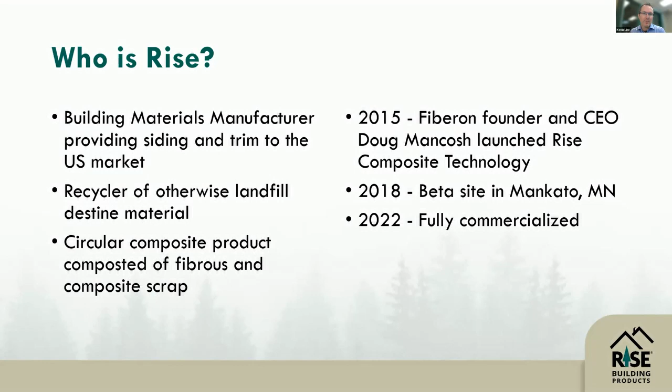So a couple things about our green story, and I think these two superlatives really jump out to me. We think about our legacy, our start was with recycling carpet. We've expanded that into a lot of different materials, but we started out looking at how we can take carpet out of the landfill. Every year in the United States, 56 square miles of carpet is put into the landfill, and that's an enormous amount of material.

There's a lot of life left in that carpet, maybe removed from homes, renovations, whatever there might be. That material still has a lot of life and can be used for other purposes. Incineration, landfill, neither of those are good options for this product, and that's what we've done, is been able to turn carpet and lots of types of fibers, composite fibers, into far more productive materials.

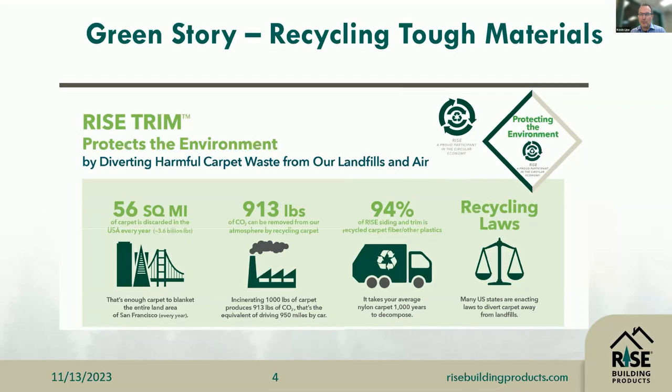94% of our finished product is composed of recycled materials, so there's very little new material required to make what we're doing here.

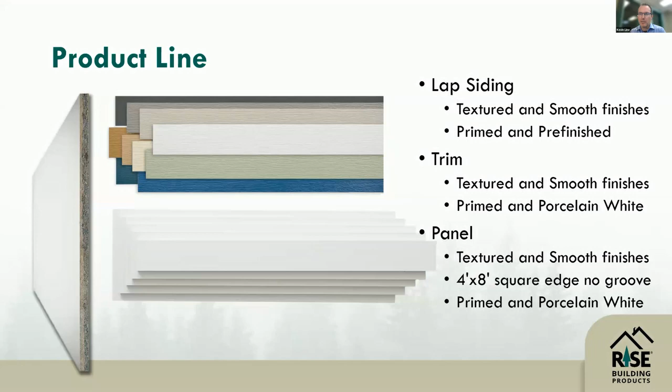Here's our product line. Our products are lap siding, trim, and panel products. So if you think of cedar siding, wood panels, a similar product might be HardieBoard, HardiePlank—that's the type of products we're making here. These are finished, ready to use on construction sites, on single family and multifamily homes. We'll make a variety of products to support that industry.

So an overview of our process. I'll spend a few minutes here.

We want to emphasize the point, we're a truly circular process. We start out with these recycled materials. We resize those to fit our process. Our raw materials can come in as whole products, sheets, any number of different forms. We grind those down to a specific fiber length.

Step 2 goes into our resin blending. We add our resin and our waterproofing agents. Step 3 is we create a continuous web mat out of that—I'll show you a photo of what that looks like in a second. That mat has our facer paper on both sides.

Step 4, we move into our hot press, and under heat and pressure, we're able to consolidate that mat into finished product. It goes from 10 inches of loft down to 1 inch loft, or less, depending on the type of product. Next we'll cut this panel, in various stages. At this point, this cuts in a very similar manner as wood products.

And then lastly, we finish and package, and it goes to market. If that product needs to be recycled, we'll take it right back into the beginning of the process, and we can start the whole process over again.

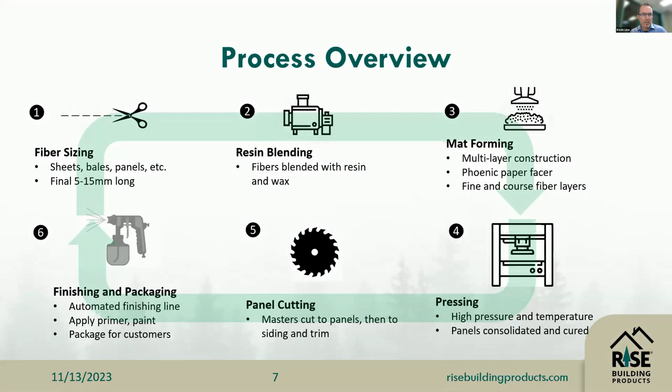So we initially started out recycling post-consumer carpet. This is carpet that was recovered. Certain states that have these recovery programs will remove the backer, bale this material up, and send it to us. From left to right, you're seeing the carpet as it's removed, the bales as they come to us in the middle photo, and on the right, after being ground and ready to be resinated. This converts that carpet into a fiber that we can use in our process.

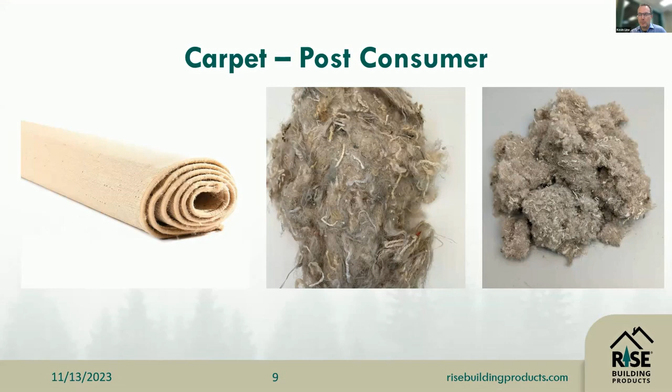Another pretty readily available material is post-industrial automotive fibers. These are very difficult to recycle otherwise, because usually the liners that go into trunks, headliners, and floors of cars are composed of multiple types of fibers. It could include some low melt plastics, some polyester, some fiberglass, and otherwise these become very difficult to separate. So this is, in one sense, a composite material that we are then grinding up. We receive it, and it looks like the middle photo; when we are complete with our grinding process and ready to be resinated, it looks like the photo on the right.

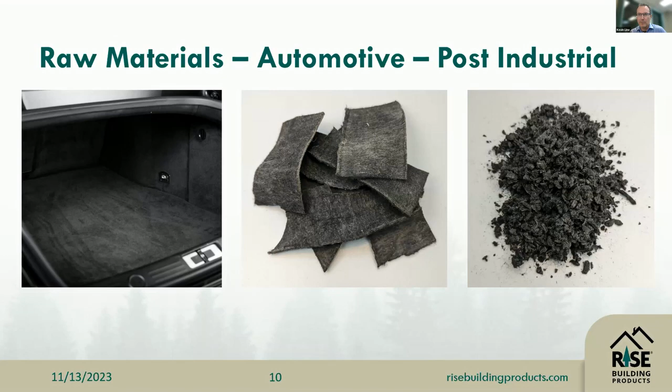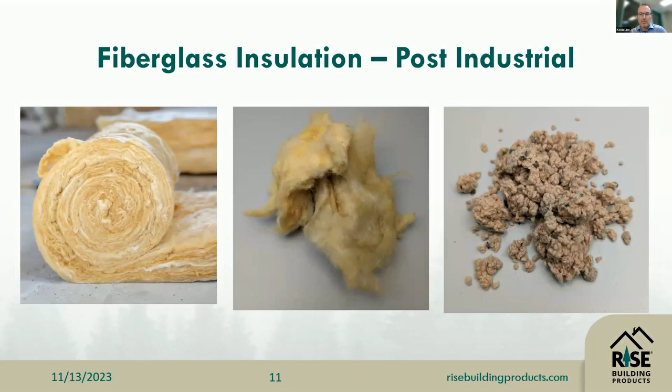Additionally, fiberglass roll insulation. Again, this might be a post-industrial type product, scrap out of the manufacturing process. There's been no real way to recycle this either—usually it's landfilled. In our case, we go through the same process of resizing this material, grinding it up, and it's ready to be resinated.

The newest addition to this is that we recognize our process would work very well for wind turbine blades, as well as finished composite products. A composite product is a collection of multiple types of fibers with a resin binder. Because we don't need to separate any of those materials, we can use them as delivered. Our process lends itself very well to recycling wind turbine blades, scraps from composite manufacturing, or even composites in other industries.

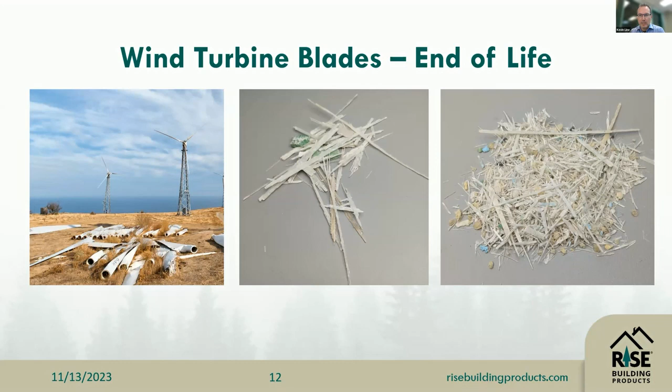In the next couple slides, I'll show how we jump from grinding to how the material looks as it's being formed.

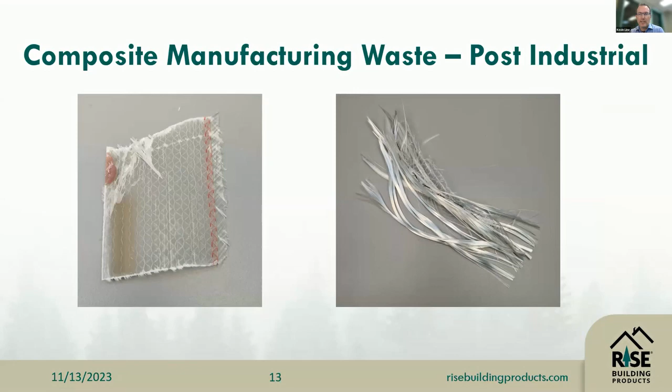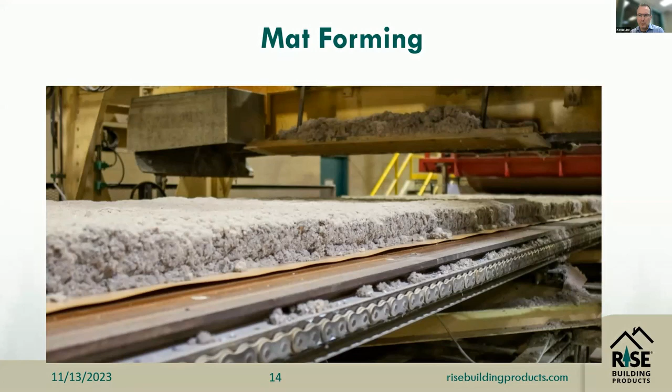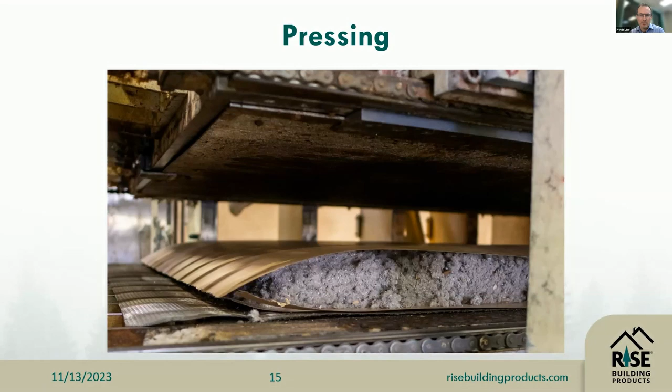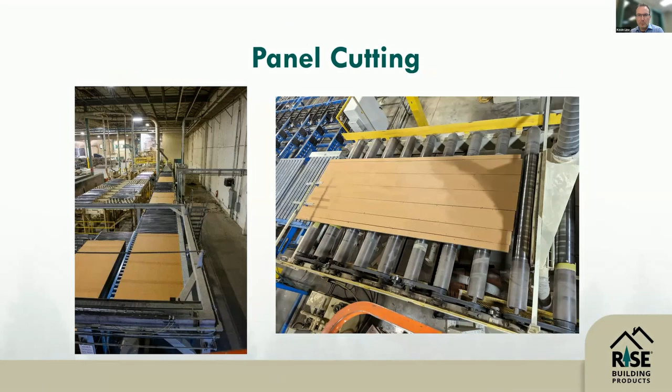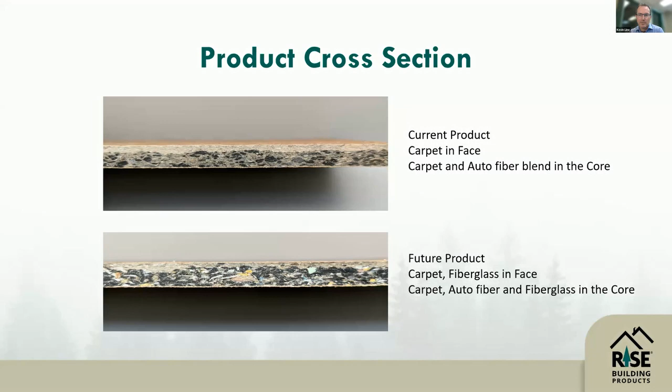So Rise, as a growing company, we have an opportunity to continue to take in additional raw material streams. As illustrated, we can use fiberglass, composite materials, resin, foam, balsa wood, and other raw materials without needing to separate them. We can put them straight into our manufacturing process. We're very open to conversations with others who'd like to discuss waste streams, so we can make composites a much more sustainable product line.

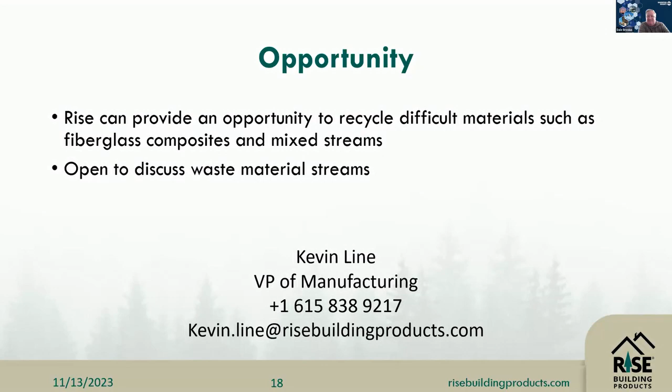We have a full quality management system that guides our manufacturing. We take various required test data to ensure our product is compliant. It really all drives back to the acceptance criteria for siding issued by the Code Council. Those ESR reports are what allow us to be used as siding on homes, and if you're architecting or seeking approvals from code officials in municipalities, those are the types of reports they'd look for on this particular product.

I had a question come in the Q&A about carpet and a previous experience of trying to use post-consumer carpet, and the risk that they were told they couldn't because of hazardous waste concerns. Are you able to get around that concern?

Yes, it is our carpet. We don't actually handle the carpet directly. The carpet goes through processing centers, usually in the municipalities where it's collected. Those processing centers deliver to us, and there's no hazardous waste associated with it. We've gone through the SDSs and testing, so there's no additional hazards associated with the carpet as it's delivered to us. That's all handled on the back end.

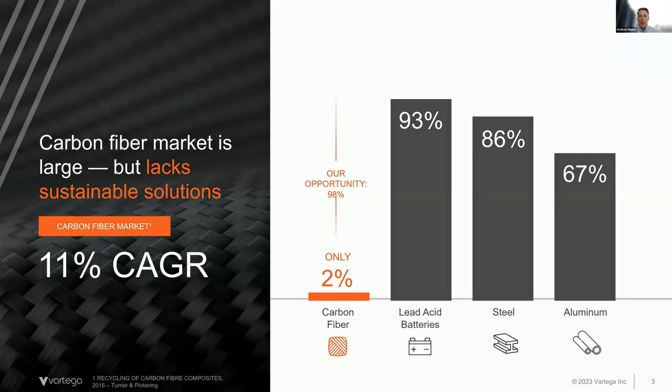So Haley, there we go. There's your slide. I want to let you talk about MITO and talk about your stuff. Go ahead.

Yeah, so like I said, at MITO we functionalize. We have a novel chemistry platform that allows us to do surface chemistry on graphene and other 2D related materials. The way we see ourselves in the market is really helping composite manufacturers and product manufacturers utilize graphene as a material. When we do that and we work with our partners, we want to make sure that not only will it disperse into your system, but it's going to be easy to integrate into your existing manufacturing process so that you can realize and unlock the promise of graphene.

And that's really how our collaboration with Vartega came about. If you're interested in using graphene, we have additional products not used with Vartega, primarily Ego, utilized in sports and rec, which has shown the ability to lightweight other composite materials like golf club heads and fishing rods, which you may have seen at CAMX, as well as skis. Anything with fiber reinforced composite manufacturing systems, those products can go into the resin or on top of prepreg and really realize some very significant changes, improvement in strength, toughness, as well as lightweighting capabilities. But with Vartega, what we're talking about today, we actually developed an entirely new product to work within Andrew's system of recycling carbon fiber.

We saw this as a unique opportunity to see if we were able to coat graphene onto the carbon fiber through the sizing agent. So we developed what we're now calling Ligra, which is liquefied graphene. It's a water-based solution, and we were able to introduce that into the sizing process at Vartega.

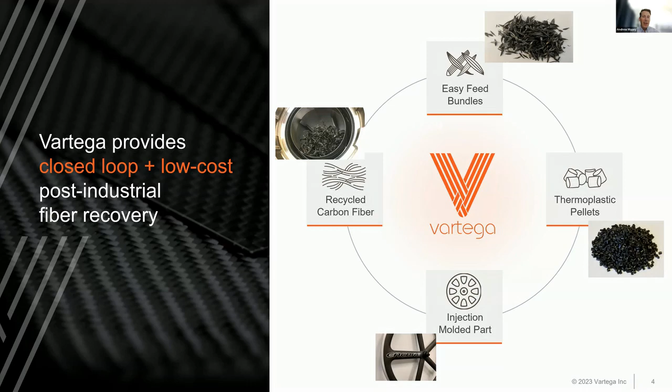So we did that, and for CAMX, we wanted to show a little video that the MITO team put together. Hopefully the audio comes through.

So together we introduced Fenix Fiber Plus to CAMX.

The cool thing there is it allowed us to differentiate our product offering a little bit. We've now got a good, better, best product here. And with MITO inside, Fenix Fiber Plus has not only premium performance, but other benefits around sustainability that we can talk about in the future. This is really cool for applications where you need that increased performance, and there are different pricing structures across these products as well.

The cool thing was we were able to take that to CAMX and report out on some data on those materials. We were really excited about the performance, especially a couple of key criteria, specifically elongation and impact toughness. Flexural strength was also improved, and the governing material for the modulus is actually the fiber, because carbon fiber is so stiff to begin with. We were really excited about the performance improvement we saw from adding Fenix Fiber Plus, or the MITO material, the Ligra material.

This is just kind of scratching the surface. We're going to do a lot more development. This particular test was at 20% carbon fiber in nylon, but we want to explore polypropylene, do different weight loadings, and evaluate different criteria like conductivity and damping properties as well.

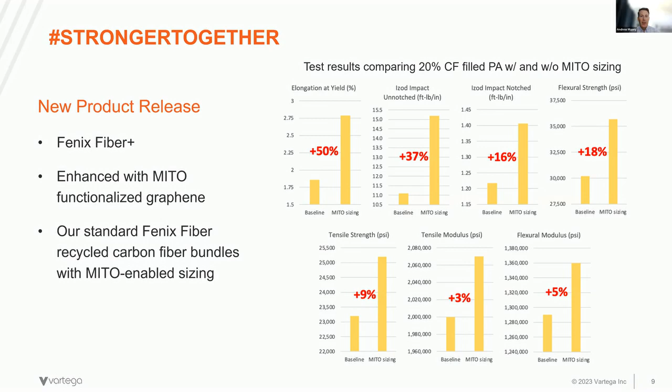Haley, you want to talk about the ACE Award? Yeah, I think that data and this collaboration really opened our minds to how we can utilize these recycled materials, recycled carbon fiber specifically, into new markets.

Andrew's talked a lot about what it looks like in the automotive market to utilize recycled carbon fiber through his process with the Easy Feed bundles. When you look at the improvements in performance, you're able to open up new market opportunities that weren't looking at recycled materials before, because maybe they thought there was a sacrifice in performance. But now they're able to look at it with a more serious understanding that it can solve for mechanical improvements and really get the increase in performance without sacrificing sustainability.

So we used those ideas to apply for the market growth, infinite possibility category for the ACE Award, which is the Composites Excellence Award given at CAMX. The category we specifically targeted was infinite possibility for market growth, because we believe that by upcycling these materials with novel additives like graphene and functionalized materials, it can really open up new possibilities in different markets and a lot of opportunities for application.

We are super thankful for our collaboration with IACMI on this project specifically, because these panels in front of us on the table are actually interior components for an automotive door frame. They were made at University of Tennessee, Knoxville, with connections we had through IACMI. Students were truly working up until the last minute to get these panels made for CAMX.

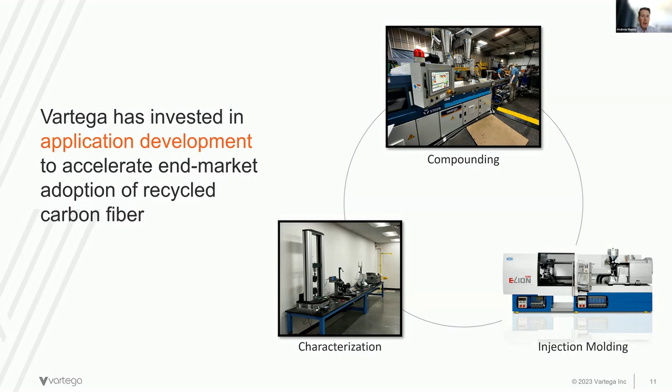And as we do that, to kind of come full circle on the sustainability piece, I can tell you year to date at Vartega, because of recycling carbon fiber - carbon fiber is crude oil based - we use significantly less energy to create our easy feed bundles than to manufacture virgin carbon fiber. So this year we've already offset 5.2 rail cars of oil.

So as you're sitting at that railroad crossing and you're seeing those tanker cars go by, just think about all the recycled carbon fiber that we can help you incorporate into your materials. So thank you for your interest.

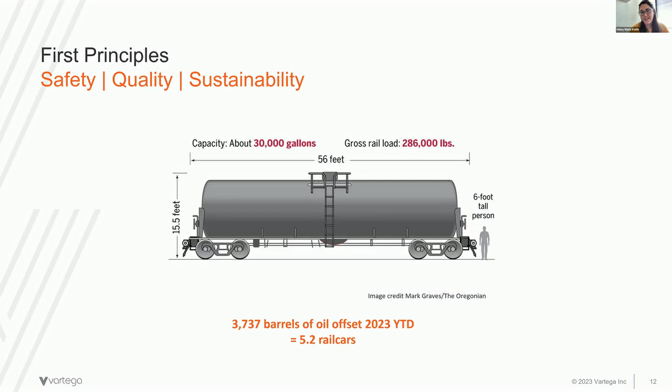All right, great. So time for a couple of questions here. And we've got one that came in. It says, looks like your focus, this is to Haley, your focus is on thermoplastics. Have you done any work with thermosets? And if so, which ones?

We actually focused more on thermosets originally. This is our real first delve into thermoplastics through the addition onto the fiber. So we have worked in thermosets extensively, and we can work with you on your specific polymers, but off the hand, we work within epoxies and carbon fiber and fiberglass reinforced composite systems with different manufacturing methods.

We can go spray onto the pre-preg with our material. We can go into the resin and then create pre-pregs and tapes. We've worked with polyester and vinyl ester resins, as well as epoxies. And we have a lot of data that I can share on that. If you would like to talk with my team, happy to do so. We have a lot of data there in the thermoset areas with graphene.

Some things in coatings and adhesives as well - that's true, yes, we're working with coatings and adhesives formulators currently. Graphene has a lot of unique properties, one of them is thermal conductivity and electrical conductivity. So the ability to decrease open time on adhesives has been significant. And in the coating space, there's some antimicrobial properties that graphene oxide provides. So we're working with clients there to work with their formulations to kind of unlock those properties and get them to disperse accurately within those systems.

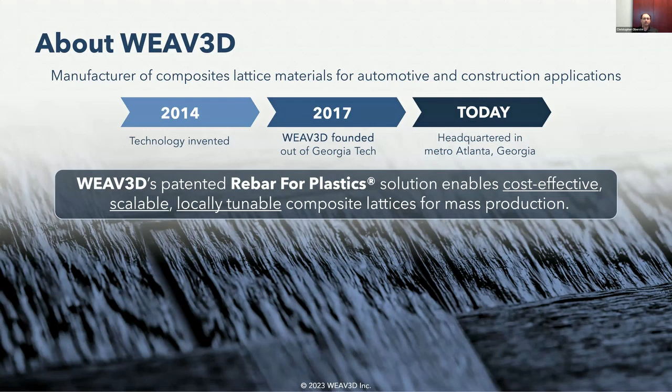For your reference, WEAV3D, kind of like Vartega and MITO, is a startup. We spawned out of Georgia Tech back in 2017—I did my PhD in materials science there—and we're still based in the Metro Atlanta area today. If you don't know us, we're a manufacturer of composite lattice materials, and I'll talk a bit about that. Our core focus areas are automotive, about 80% of our focus, and construction, the remaining 20%. Conceptually, what we're able to do, and what I want to talk about today, is a concept called rebar for plastics, which allows us to produce a cost-effective, scalable, and locally tunable composite lattice material suitable for mass production.

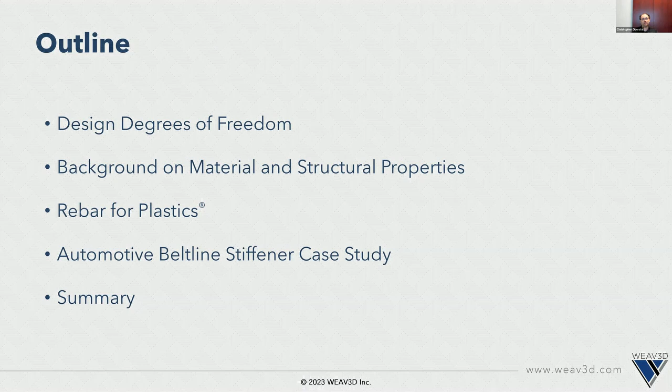Just a bit of an outline: this presentation is a hybrid of one I presented at CAMX. There's some academic background on what we call design degrees of freedom and structural and mechanical properties. Then I'll go into the rebar for plastics concept, and finally, as Dale alluded to earlier, we'll talk about our recent automotive beltline stiffener case study that we did with Braskem.

Design degrees of freedom is a principle in component level part design. It basically says if you have a material and a part geometry, what variables can you adjust to change the part level properties, things like load capacity or part level bending stiffness.

The simplest version of this is something like sheet metal, where the part curvature may be defined by the application, but by changing the gauge or thickness of the sheet metal, you change the stiffness and load capacity, even though its strength and modulus remain the same. A single degree of freedom means a homogeneous material over the entire surface, where you're just changing thickness.

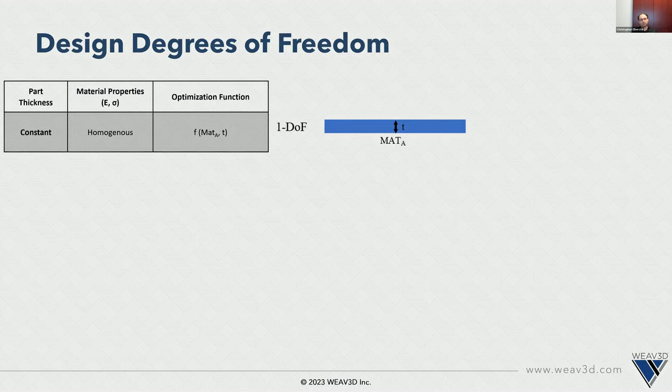Two degrees of freedom is oftentimes things like injection molded plastics with ribbing, or laminate composite structures where you can change the amount of plies in different areas. Again, it's a homogeneous material over the entire part, but we're changing thickness in different areas and the distance between those thicker regions, giving us extra variables to play with.

Three degrees of freedom is traditionally the limit for most composite designs, things like back-injected laminate structures or composite laminate stack-ups with cores or mixed materials, where you might have a ply of glass fiber, a ply of carbon fiber, and then a core, and so on. You're homogeneous within each layer, but heterogeneous through the thickness. Each different material can have different thicknesses in different areas, but within its own layer, it's one material.

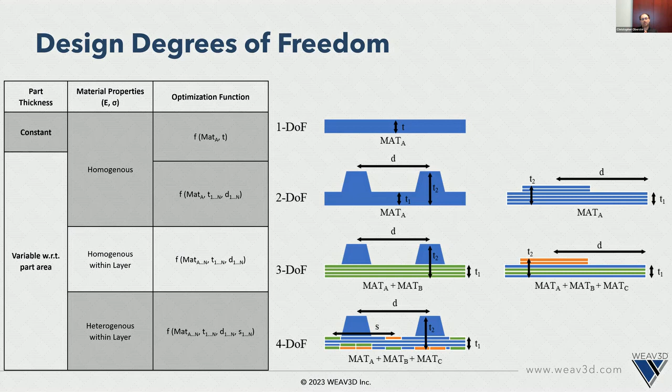What we're going to talk about here, and what our rebar-for-plastics concept unlocks, is heterogeneity within the layer. Within a single plane of the composite, we can change mechanical properties by changing the local spacing of material within that plane, and by mixing different types of materials into the structure. We're combining these lattice reinforcements into other plastic parts, so you have a bulk material, and within your reinforcing material, multiple different material properties, giving you regionally tunable performance throughout the structure.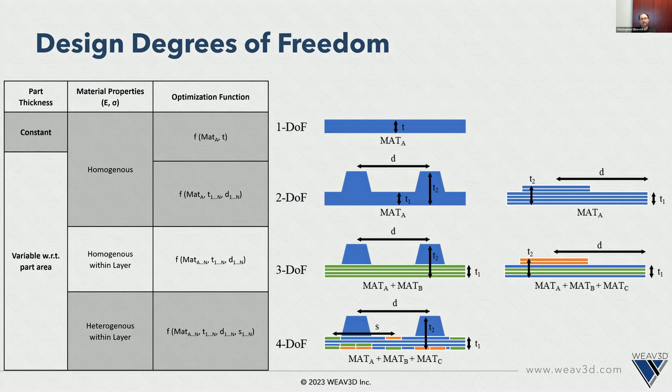Looking at material properties versus structural properties: things like modulus and strength are normalized per unit area, or toughness per unit volume. But structural properties are how the part itself behaves, things like bending stiffness or load capacity, which are influenced by both material property and part geometry.

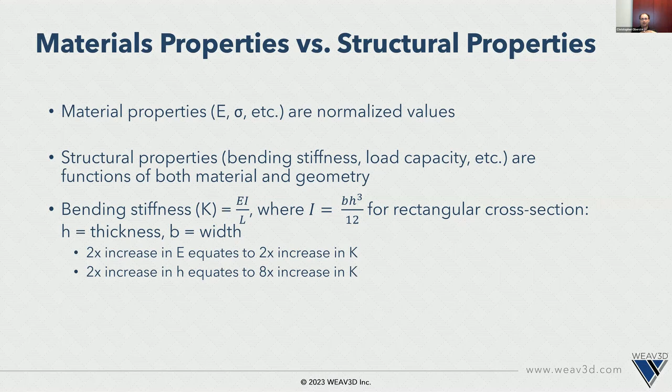One simple example is bending stiffness for a rectangular cross section, where bending stiffness is a function of modulus E and I, the second moment of area. I is defined by the width times the cube of the thickness. So if you double your modulus and keep geometry the same, you double bending stiffness, but if you double thickness and keep material the same, you get an 8 times increase in bending stiffness. This is why injection molded parts use ribbing—it provides extra bending stiffness in a material efficient way.

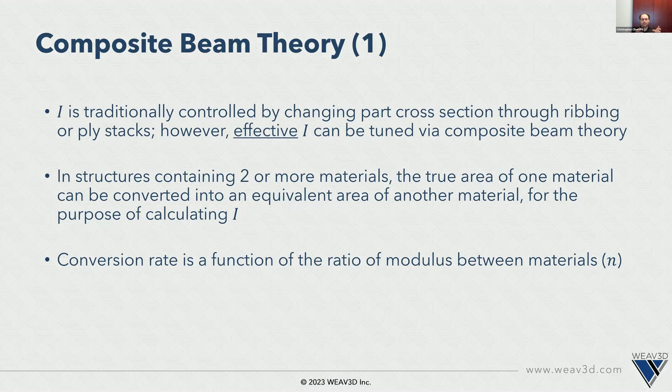This can be applied in the rebar-for-plastics concept through composite beam theory. You can use ribs or ply stacks of two different materials and convert them into an effective I of one material based on the ratio of the two materials' modulus. So if you have material 2 and material 1 and want to convert between them, the effective cross-section of material 2 converted into material 1 is the original cross-section times the ratio of the modulus.

What this looks like in an effective area calculation: if you have a plastics material as your base, this is the neutral axis, shown as the dashed line, for the original material. I then add a layer of composite on the top and bottom.

I convert the original material into an equivalent area of the composite material, and my equivalent area looks like an I-beam. If I then take that neutral axis and apply that material only to one side, with the same number of layers, so 2 layers to one side, you'll notice the neutral axis comes down, which means it's less efficient to add material to one side versus both sides, but your equivalent cross-section is a T-beam.

You're basically getting a virtual structural shape by having these two different materials in the structure. This is also why in a lot of laminate designs we use core materials. They're basically doing the same thing by creating these sandwiches.

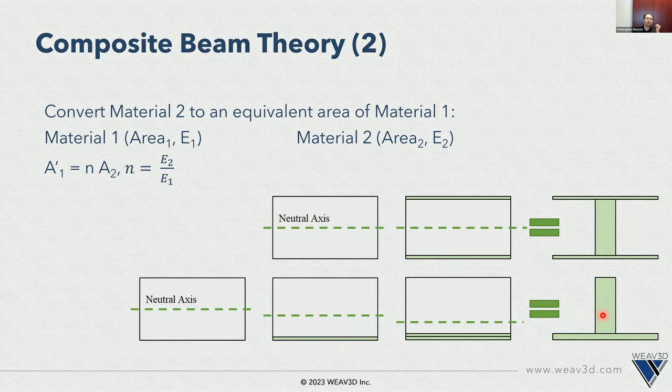So one of the challenges when we're talking about laminate construction, and particularly things like organosheet, which is what the back half of this presentation will focus on, is that the laminate is basically building both your thickness of the part and the material properties of the part.

So if you then overmold that laminate with ribs, you're effectively putting a cheap material on top of a very expensive material, and that expensive material is still making up the bulk of your cross-section in the part, which means you've got a lot of expensive material sitting around the neutral axis, and it's not fully being utilized to carry the normal stresses in bending, the tensile and compressive stresses it really wants to carry.

Rather, it's being loaded with shear stress, which for laminates is a problem because they want to delaminate when subjected to severe interlaminar shear.

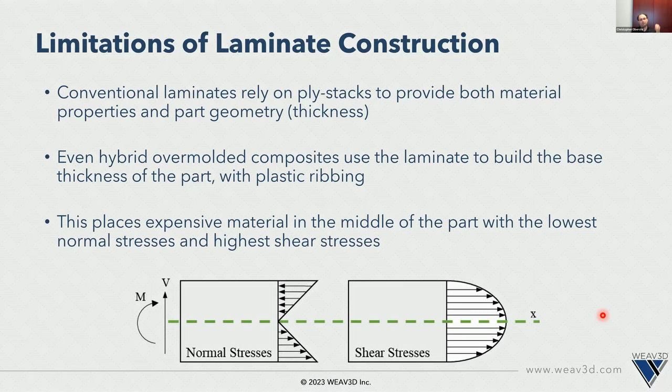So this is how we came into this process. We were looking to develop a new type of composite forming process suitable for high volume production. We came up with what we call rebar for plastics.

What this is, we take a thermoplastic unidirectional tape. These are commercially sourced materials; we don't do any of the tape production ourselves. But we convert these tapes using a proprietary forming machine into lattice structures, similar to what you see on the left.

These lattices can then go into conventional plastic molding processes like thermoforming, compression molding, or injection molding. The resulting part is a hybrid of this structural skeleton created by the unidirectional tape and the thickness buildup you get from the molded plastic part.

You can see this in the top right corner, where we have a heterogeneous structure that is 2 different types of tapes. In this case, it's a natural fiber polypropylene and a carbon fiber polypropylene. The carbon fiber polypropylene actually has variable spacing, so it's denser in the middle, then the spacing goes a little more sparse as you go to the edges. This localized tunability gives you a lot of control over where you put the material and how much material you use.

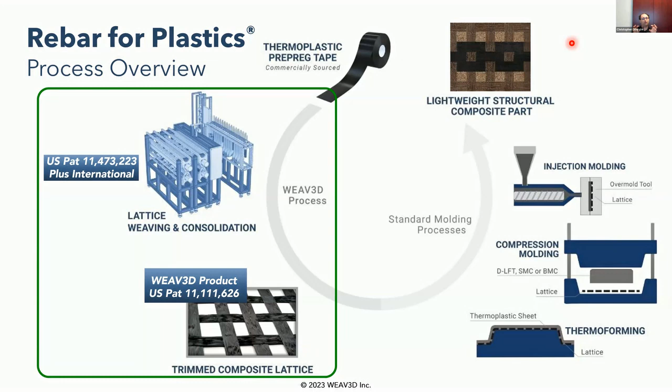To give you a practical example, this is the automotive beltline stiffener part I mentioned earlier. This was originally developed by Clemson Composite Center as part of a Department of Energy project with the goal of redesigning a steel door into an all-composite door with a 50% weight reduction. Their original design concept called for using a carbon fiber nylon 6 organosheet, woven organosheet.

They were going to mold this organosheet and then trim out all of the window areas and things like that. So as you can imagine, if this is your part here on the right, starting from a large rectangular blank, you're going to have a lot of waste.

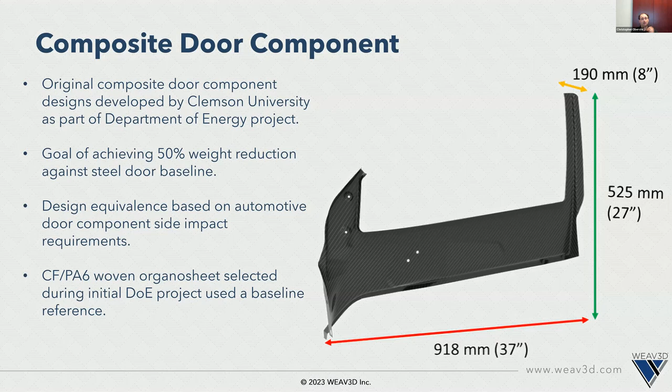So we came into this project, in partnership with Braskem, and wanted to propose an alternative: can we redesign this part into polypropylene, but using a lattice structure to optimize the amount of material used?

But even with just this data set, we were able to show that by tuning the types of materials that you use and how much you use in which areas, you can change that stress strain curve pretty much any way you want.

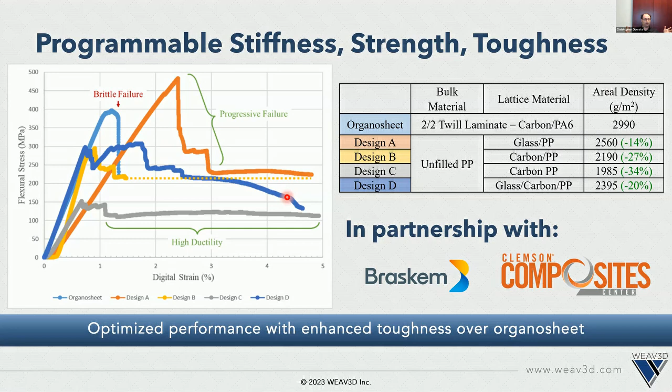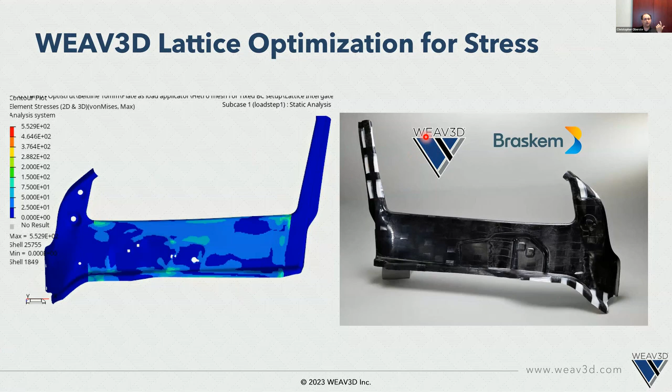So we took these flat panel results and did FEA analysis on the actual part itself. What we noticed is there's a really high region of stress in the middle of the part, as you'd expect, since this part is designed to withstand a side pole impact on the passenger or driver's side door. But there's very little stress on the A and B pillars because these are glued into another component. So we realized we don't need a whole lot of lattice reinforcement in this area above and below that middle sash. We can effectively just use the middle area for the high density reinforcement, and use less material in those areas that we know will get trimmed out at the end of the day.

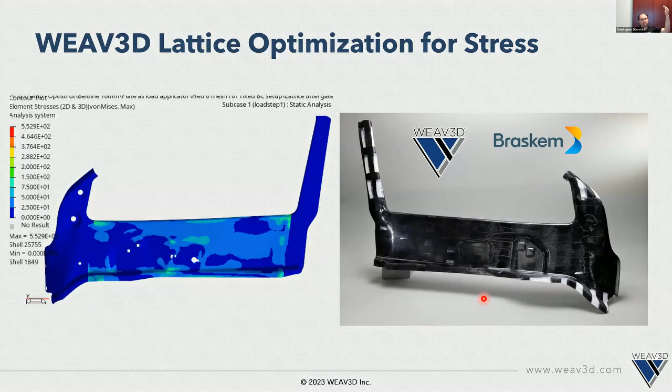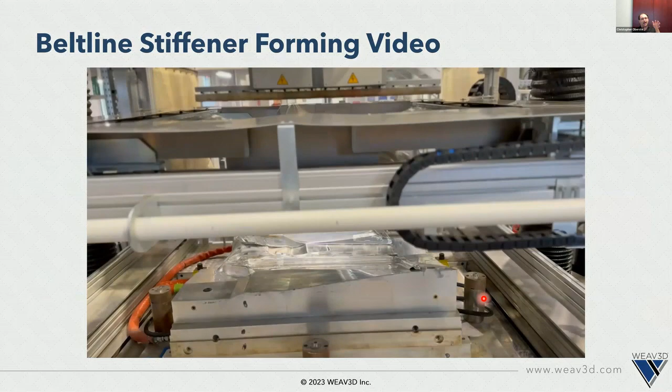So from an overview perspective, our manufacturing process produces a lattice material going through our process as a tape, coming out fully consolidated. We then did a lamination process, making that sandwich of lattice, polypropylene, lattice. Then we formed the actual part with a thermocompression process, and did a water jet trim to finalize the geometry.

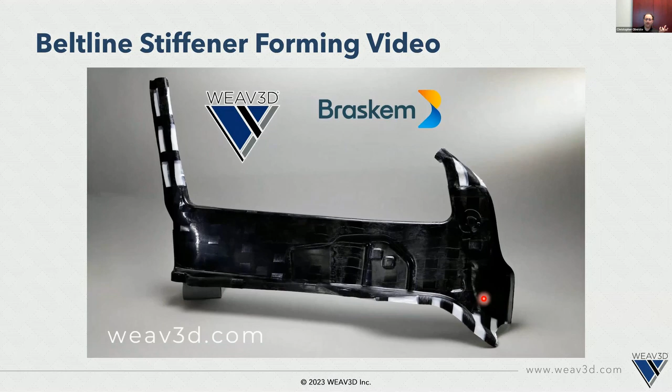So the advantage of this approach is that compared to a carbon fiber PA6 organosheet, we were 50% cheaper, actually cheaper than a glass fiber organosheet. And that glass fiber organosheet did not meet the performance requirements, whereas our solution does. We were even 20% lighter than the carbon fiber organosheet, which is kind of shocking.

The key thing here is that we were able to improve the yield of this panel in terms of mass in versus mass out, from 25% in the organosheet to about 45% in our solution. That resulted in about a 63% reduction in trim waste. So not only is this lighter and cheaper, but it's also a more sustainable solution in terms of reducing waste to landfill.

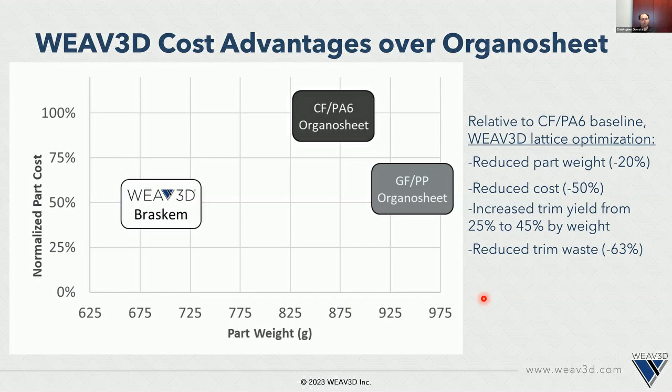But we weren't really satisfied with just doing that benchmark against the organosheet. So we also took that same design and modified it slightly, using a natural fiber nonwoven mat instead of pure polypropylene for that middle layer. The total thickness of this panel was about 2.1 millimeters. By comparison, the one I showed on the previous slide for the actual belt line was about 2 millimeters. But what we were able to demonstrate is that this same lattice reinforcement pattern, compared to something like 20 gauge stainless steel, was 1.8 times stiffer, 3 times higher bending load capacity, and 65% lighter.

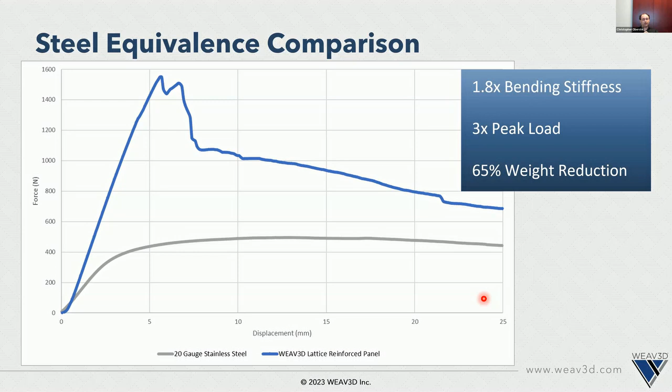And just to compare that against the natural fiber on its own, to show you that the lattice is doing all the work here, that's the force displacement curve for the natural fiber mat by itself. So our solution is 25 times improvement over that natural fiber mat.

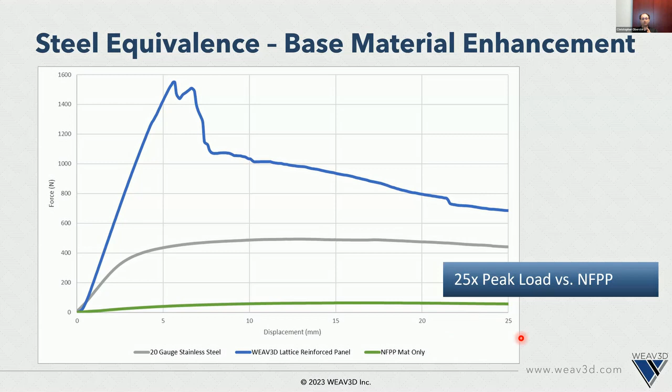But the other important thing that I think a lot of people don't realize with thermoplastic composites is the amount of recovery capacity. All of these samples you see here were loaded to that 25 millimeter total displacement. If you look at these panels afterward, that steel panel is permanently deformed.

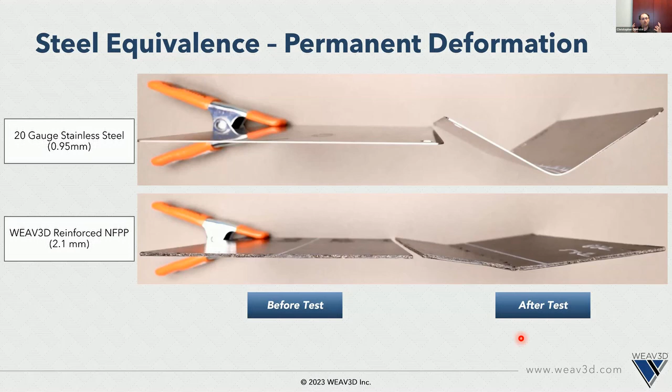So effectively, if this was a door of a car and you got into an accident, that door is now crushed into the passenger compartment, and it's going to make it difficult for the passenger to exit the vehicle. Whereas if you look at our solution, after taking all that 25 millimeters of deformation, it springs back to within just a few millimeters of its original shape. So that's going to be much easier for someone to get out of the vehicle because it's no longer this kind of crumpled mess of material.

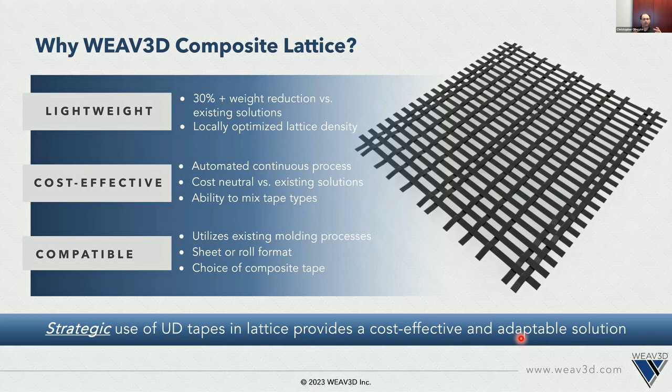So summarizing here, why use a composite lattice in general? Depending on what we're comparing against, whether it's metallics, plastics, or organosheet, we're offering anywhere between a 30% to 60% weight reduction versus conventional solutions. We can locally tune these geometries, and this is a cost-effective automated continuous forming process that is compatible with existing molding processes. So it's really intended to be a high-rate industrial technology suitable for high-volume automotive manufacturing.

If you guys are interested in learning more about this, please reach out to us. I showed you the automotive beltline part for the body structures application. We're also doing a lot of work with sustainable interiors, so if any of these catch your fancy, let us know.